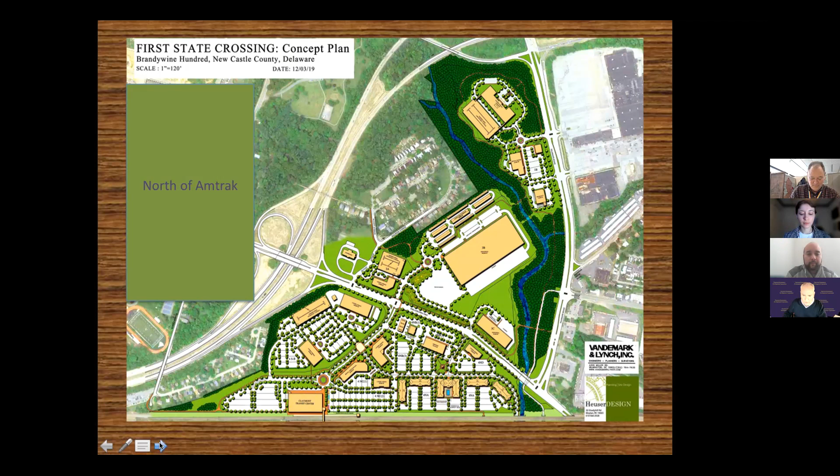You have apartments, residential, quite a bit of residential, and of course the river. Now this is the area where we're looking to do the park. This is the developer's initial plans for this area, and the developer wants to donate 125 acres for this park. So this is most likely going to be changing a bit from the final product, but it gives you an idea of where we are.

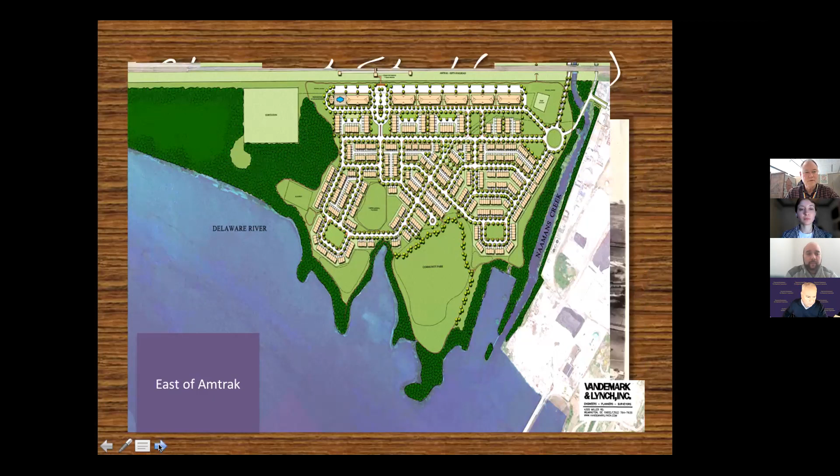And this is just a start, but we want to connect Claymont to itself. Claymont, from before the 19th century up till the early 20th century, utilized its waterfront. With the additional train traffic, and especially with the building of 495 along the river, we lost that access. So let's get some of that access back somehow.

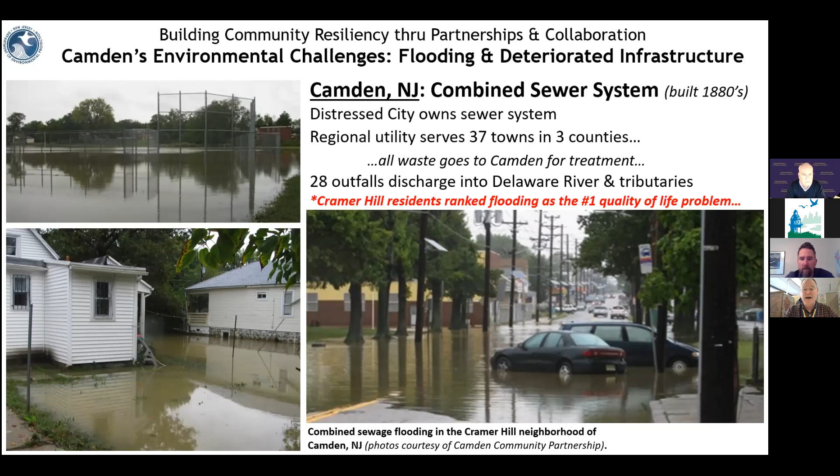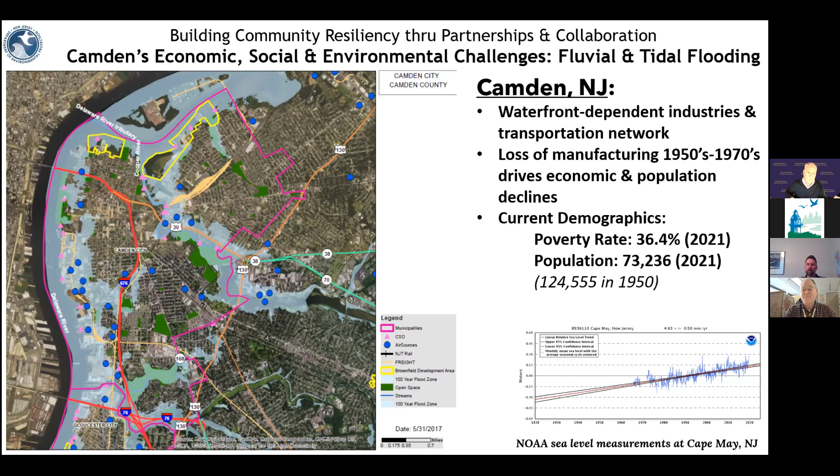Next slide. Well, I've got control of that. Sorry, Erica.

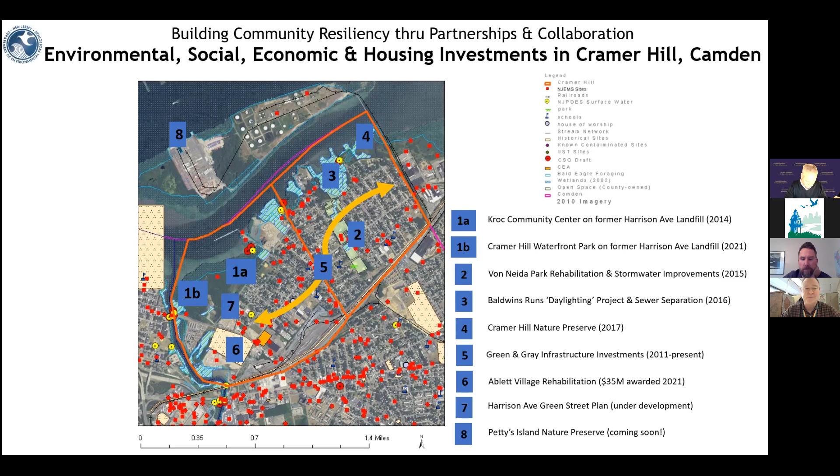Unfortunately, I only have a few moments to share with you some really amazing projects we've done throughout the city of Camden. In particular, I'm going to focus on the Cramer Hill neighborhood. I am not going to be able to get to all these projects, but we have done a lot of land and water investments at the New Jersey Department of Environmental Protection, a lot of water infrastructure investments, and some upcoming housing investments that we'll talk about in this presentation.

One of the largest investments we've done in Camden occurred in this Cramer Hill neighborhood, which is on the northeast side of the city of Camden. This is the former Harrison Avenue landfill, an 86-acre city dump, the largest contaminated site in the city of Camden, and also the largest single site with waterfront access along two rivers, the Delaware River and the Cooper River. Camden has about 6 miles of beautiful water frontage along the Delaware River, much of it inaccessible to communities and residents like Cramer Hill until we started working on some projects 10, 15 years ago.

So this former 86-acre municipal solid waste dump is now the beautiful Kroc Community Center, serving over 8,000 area residents with a medical clinic, food pantry, and spiritual services. It has daycare, adult care, child care, after school programs, world-class recreational facilities, a black box theater, indoor water park, and an indoor Olympic swimming pool. All these things were missing in Camden prior to this.

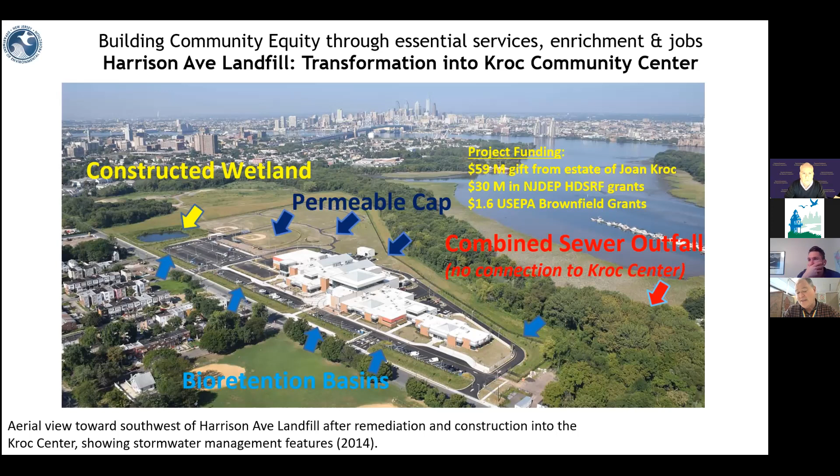So this is a story of how environmental investments of over $30 million for the Kroc Center brought in social and economic gains and jobs to this Cramer Hill neighborhood. You can see the skyline of Philadelphia, the Cooper River in the foreground, and to the right is the back channel of the Delaware River. You can see this dump was immediately across the street from the Cramer Hill neighborhood—an environmental justice issue of an 86-acre mountain of garbage dumped in the midst of this community, which also extended, and the garbage went into the two river systems as well.

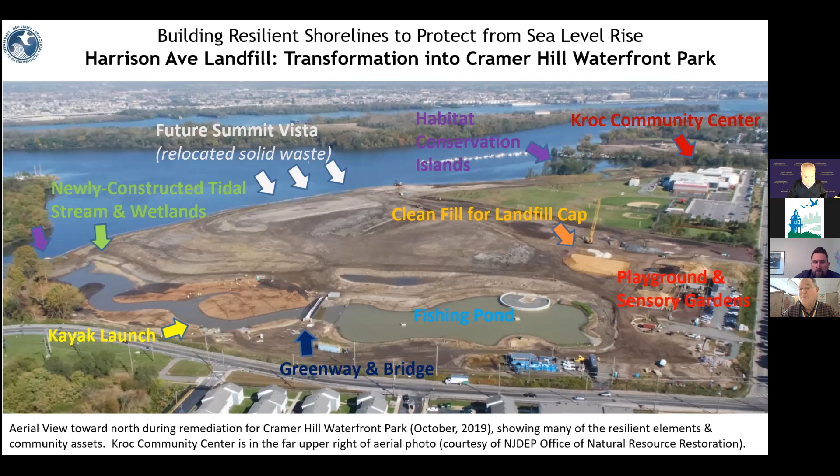Starting with the Kroc Center and going to Cramer Hill Waterfront Park on the same former landfill, this was the first large site where stormwater was sustainably managed in Cramer Hill. The Kroc Center did not put its sewage or stormwater into the combined sewage system—it's a separate stormwater management system on site, just like Cramer Hill Waterfront Park. So these were investments not only in land reclamation, but also in managing the chronic stormwater flooding that was occurring in this neighborhood.

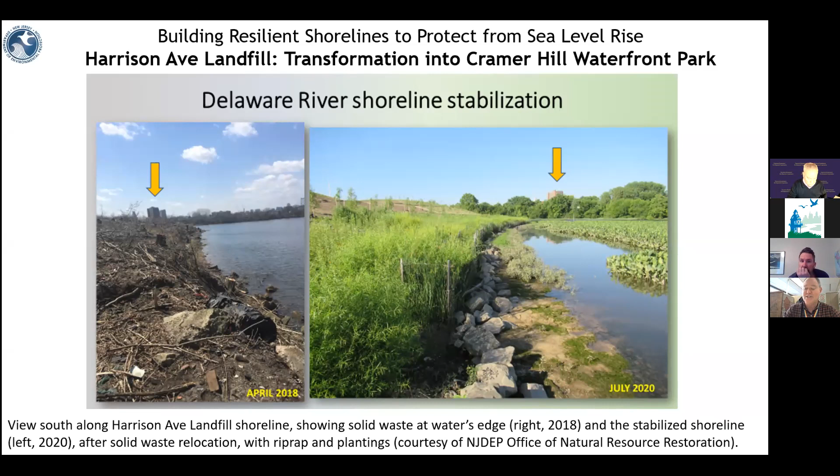My boss's boss's boss at the New Jersey Department of Environmental Protection, Governor Phil Murphy, opened the park on November 30th. There's a view of the skyline of Philadelphia from the landfill, much different than a 50-foot high mountain of garbage when I started working on that site in 2003.

Projects like Cramer Hill Waterfront Park and the Kroc Community Center can only happen with a strong and diverse set of partners. In 2011, a unique initiative called the Camden Smart Initiative was developed with some core partners: New Jersey Department of Environmental Protection, the City of Camden, a nonprofit called Cooper's Ferry Partnership (now Camden Community Partnership), the New Jersey Tree Foundation, Rutgers, and the Camden County Municipal Utilities Authority.

I don't have time to talk about all the successes with the Camden Smart Initiative, but it's a nationally recognized, successful, community-based green infrastructure initiative.

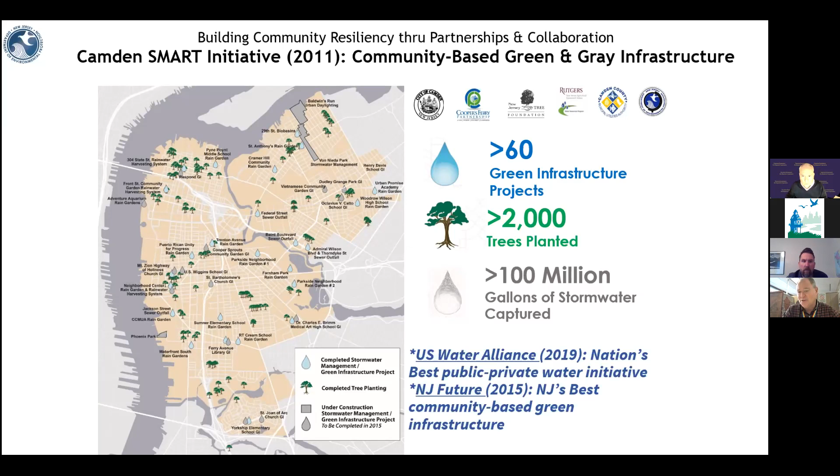In 2013, another collaborative partnership was formed called the Camden Collaborative Initiative with some of the same partners, including the U.S. Environmental Protection Agency. We work on additional environmental challenges in Camden so we can prepare for economic development, housing, and revitalization of our community.

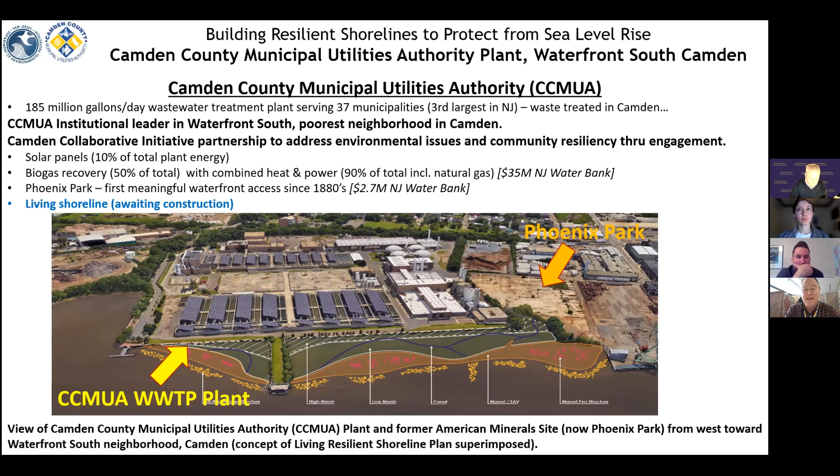Our northern New Jersey communities, and New York City, lost wastewater treatment for months after Superstorm Sandy. We are trying to prepare and adapt to future climate change by not only having solar panels and a biogas facility on this wastewater treatment plant, but also a living resilient shoreline in front of it.

Here are some components of that. I don't have time to go into specific project details, but I'm happy to answer questions during this webinar, or I can provide my email address for future questions.

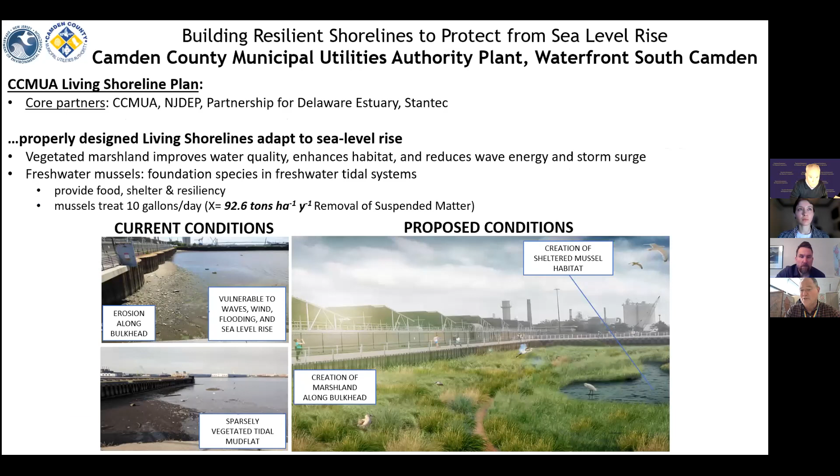Some concluding thoughts.

It really does take a diverse partnership with housing experts, economic experts, poverty experts, and environmental experts working together to address these complex environmental, social, and economic challenges we have in our cities. Investments in the environment that my agency makes also support these other initiatives: housing, economic development, and health.

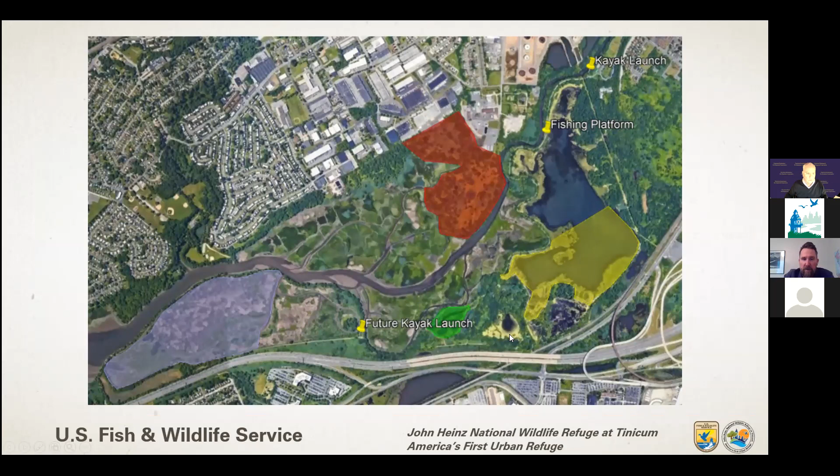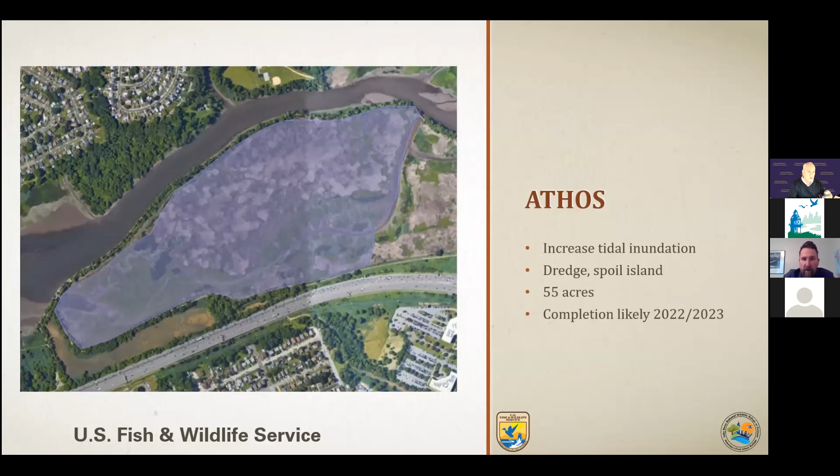So the first one is to the left here. This is the Henderson Marsh, or what we call the Athos area. This is a restoration project we're going to construction on, hopefully this fall. It's going to be funded by the Athos 1 oil spill, which was in 2004, just out in the Delaware River. This is an area where we're trying to restore the natural hydrology that was formerly impounded or cut off from natural tidal water.

This is kind of what it's going to look like, where the top right corner is the existing hydrology now. It's really broken up, so what tides do come into this basin don't move through very well. There's not really good access for fish or for people trying to kayak in it. So we're going to be dredging new channels throughout the whole basin to create better access and flow of water for fish, but also providing kayaking opportunities that normally wouldn't be there. There's also a trail around the whole basin, and we're looking to install an observation tower and a new bridge to enhance those opportunities.

This is fundamentally where we're at with the Refuge, of how do we restore the habitat not only for ecosystem services, but for the surrounding public to really be able to enjoy and become immersed in them. And one of the problems we do have is that...

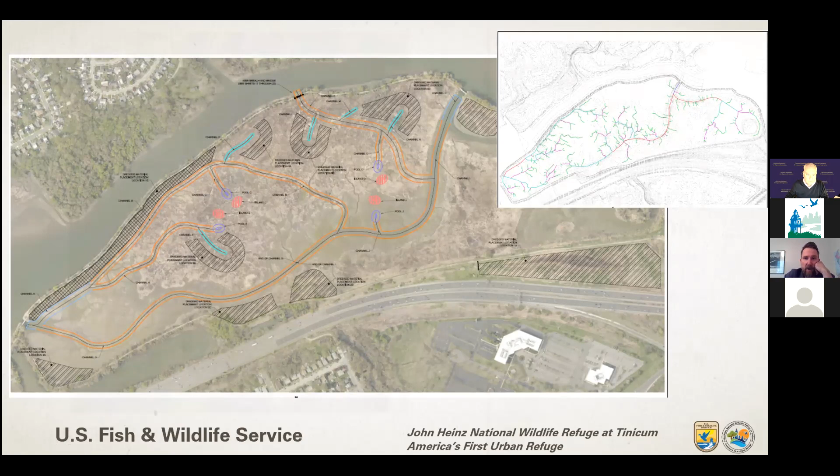When we look at usual U.S. Fish and Wildlife Service work, we do a lot of work on our land, and we really focus on the needs of the resources on our land. I think in the past we haven't done a good job of looking at the neighboring communities or areas around our refuges and how our restorations could help ameliorate or resolve some of the problems we see around there.

I think we really had a good lesson in this during Hurricane Sandy and some of the restoration that occurred after that, especially at Prime Hook National Wildlife Refuge, where we did projects for marsh enhancement, but also alleviated a lot of flooding in areas. I think that is key to what we're looking at.

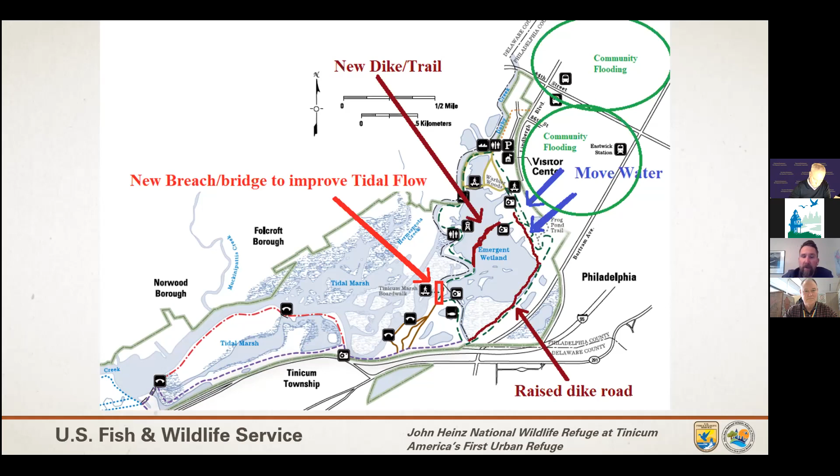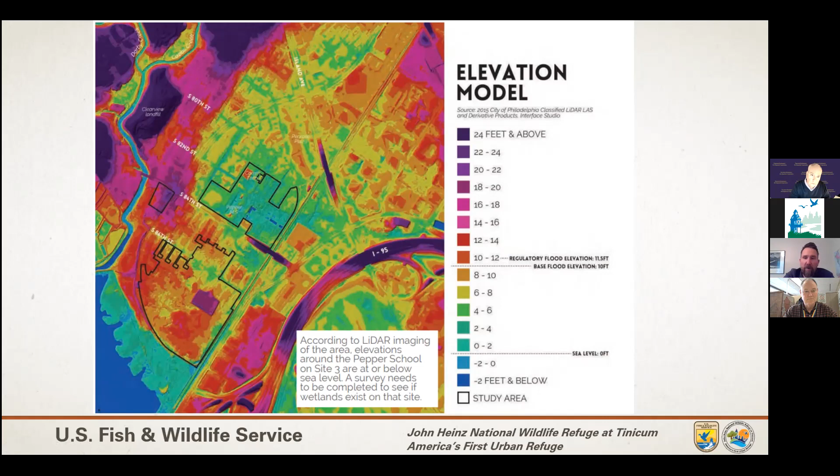So this is that area I'm talking about. On the bottom left-hand corner is that impoundment, and it's blue, very low elevation. This is the community of Eastwick, and this box right in the middle is the heart of Eastwick. You can see that's the lowest elevation, so it basically acts like a bowl. When we have flooding events, the water collects there. One of the things we want to look at is the data that's been collected, and what other projects are out there that could help inform us on what direction we could go.

For me, that was simple. I'm sure most people are familiar with the South Wilmington Wetland Project. This was an area of South Wilmington, Southbridge, with a similar thing: chronic flooding, septic and sewer systems that were broken. This was decades and decades of flooding and sewage that would pile up in basements and in the streets. One of the things done to ameliorate this was taking old brownfield sites just to the west of the community and creating a large wetland that would help intercept a lot of the floodwaters. Then at low tides, there would be tide gates that would release it out to the Christina River.

I think this really set a good standard for us because it also had great intersections of providing benefits to the community, where there was a footbridge that goes through the middle of the wetland and actually gives this community the first access to a supermarket that they've ever had, now in walking distance. So this really sets a good standard.

At the heart of this was a special area management plan, the South Wilmington neighborhood plan, developed by the state of Delaware, that really went out to the community and figured out what needs to be done and what's a good way to build something that helps with the issues they have, while really listening to the voices of that community.

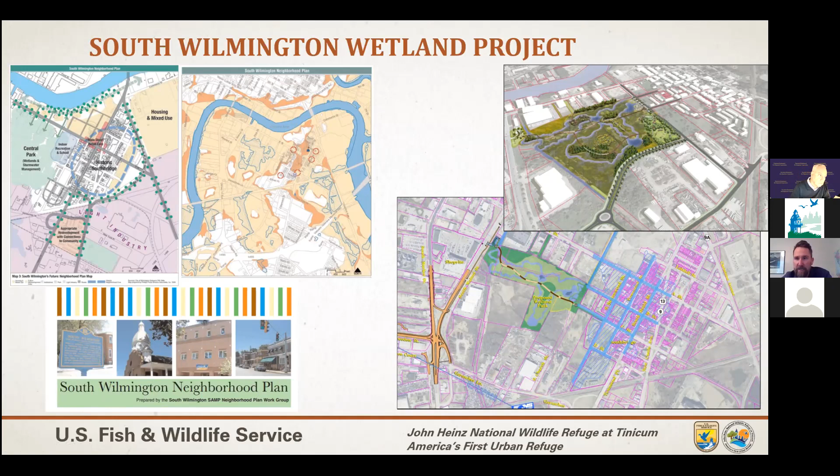There's been a lot of work already done in Eastwick. There was a public land strategy back in 2019, and a lot of that integrated what the community wanted to see. Part of that is to heal the environment and alleviate a lot of the flooding, but also build community ties, sustainable access, and nurture our youth. This is where the Refuge feels like it could really help with a couple different aspects of creating a better connection to the community, especially for people who want to get out in nature, but also tackle some of the flooding issues.

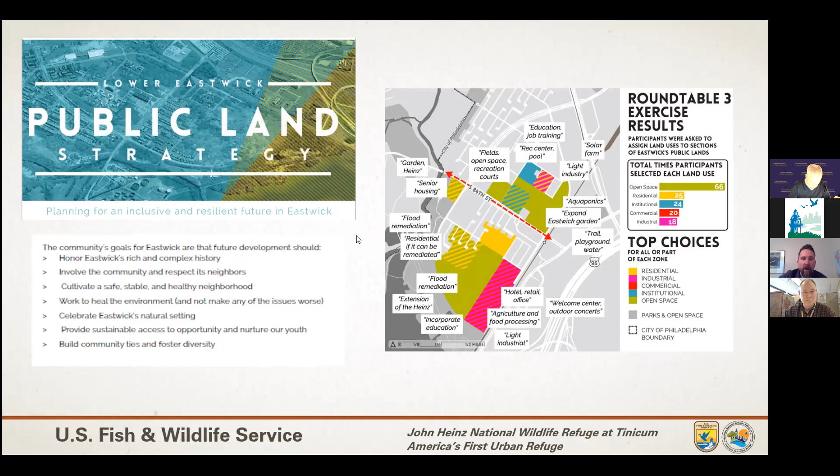In that report, a lot of different things have already been looked at, like stormwater inlets. One of the big things is all the stormwater flows basically out of the east side of the community down to Mingo Creek, where there's a pumping station. So all the tidal waters and floodwaters that come in have to go out one area, and that's an undersized area to pump out this water. We need to start looking at multiple ways to resolve that flooding. And again, it's not only rainwater, but also coastal flooding and coastal storm surge that comes up Darby Creek and around.

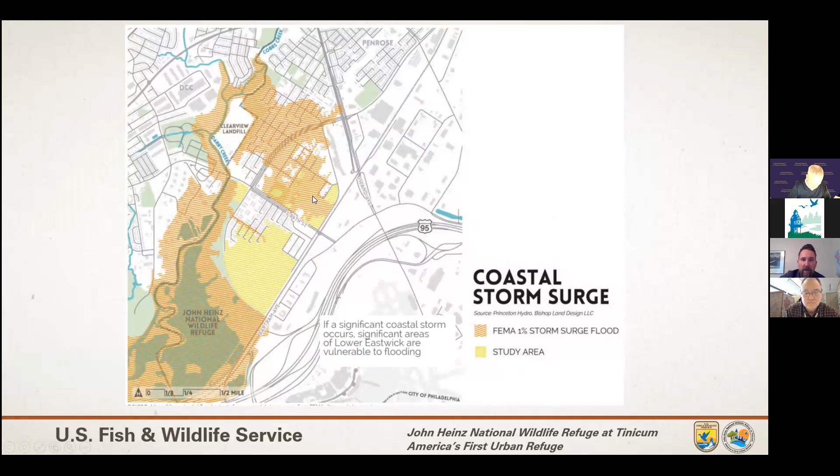One of the things we have to think about with anything we're doing is long-term resiliency with sea level rise. A lot of the sea level rise impacts to this area, there's some in Darby Creek, but a lot of it's going to be coming out of that Mingo Creek area where all this floodwater is supposed to be going. So you're going to have less ability to move floodwaters out that way over time, which means looking at alternative strategies.

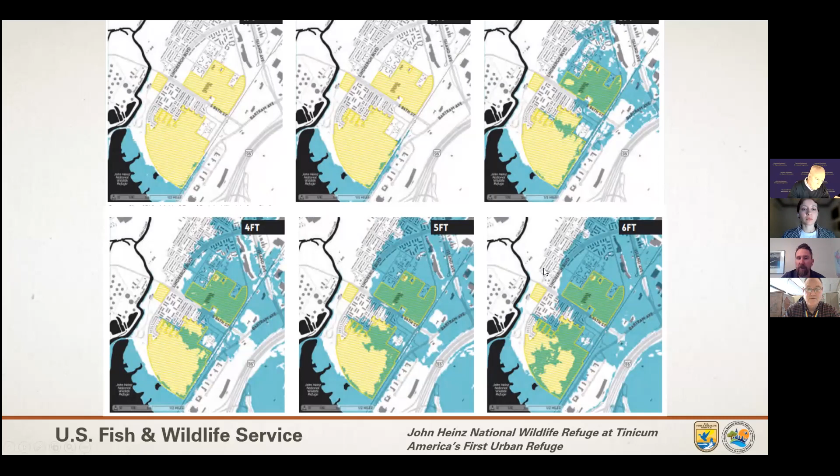One of the big things we thought about was the historic alignment of the system through Eastwick, which comes through this open area that's just an overgrown, empty lot right now. The existing plan has an idea to enhance it with some smaller wetlands and trails that connect to John Heinz. One of the things we want to do is think a little bit bigger.

We're about to do this restoration and the impoundment. How can we take that restoration and leverage it to look at a larger scale restoration project? So we're looking at this open lot, thinking almost about taking that model of South Wilmington and turning this into an area where stormwater could be diverted and moved through the Refuge to really alleviate some of that flooding. The Refuge right now is actively trying to allocate funding for this project, not just the piece that's on the Refuge. We want to look at the bigger piece, so that's getting funding to design our area and restore the natural hydrology.

We're also looking at creating a hydrodynamic model for this whole area to see how we could move more floodwater through, and actively engaging a lot of the partners in the area to leverage our funding and design with the larger picture. There's going to have to be upgrades to infrastructure and stormwater systems to help divert water into this area. But also, as we build a larger wetland there, how do we make sure we're creating connections to the neighborhood? Not only trails, but opportunities to enjoy nature, and how do we integrate our programming better to really serve that community and listen to the voice of those communities about what they really want.

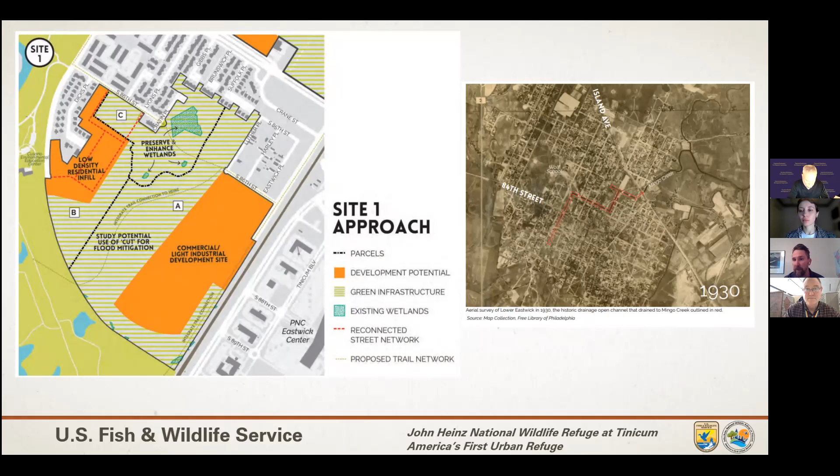We're just at the beginning of this project, and I have to give a lot of credit to Lamar Gore, the Refuge manager at John Heinz, and his staff, who really, when I approached them about making this a little bit bigger, were all on board. He's been thinking about this for a long time.

My role is to come in and help figure out how we can get this project done on the ground. As I said, for the refuge system this is not normally our model. Our model is usually to work on refuge land and think about how we partner and bring in partners to meet somewhere in the middle. But I think John Heinz is a unique opportunity for us to really start reaching into the community, not just through the great educational programs we already do, but in our restoration work. How do we actually use the refuge as a conduit to start really ameliorating a lot of the flooding?

Well, that's all I have.